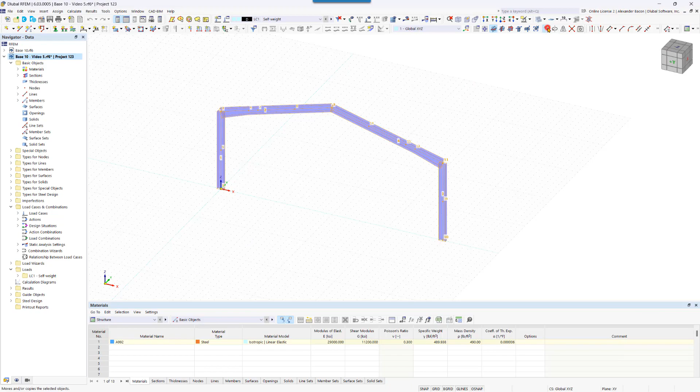Next, let's select the entire frame and then click the Move and Copy button. The new dialog box is similar to the mirror dialog box.

Since we would like to make 3 copies of the frame, we first select the Create Copy checkbox and then set the number to 3.

The distance between the copied frames is 15 feet each in the opposite y direction, so we enter the corresponding displacement vector.

RFEM also allows us to create members, surfaces, or solids between the copied nodes. Thus, when copying the frames, we can also enter the purlins.

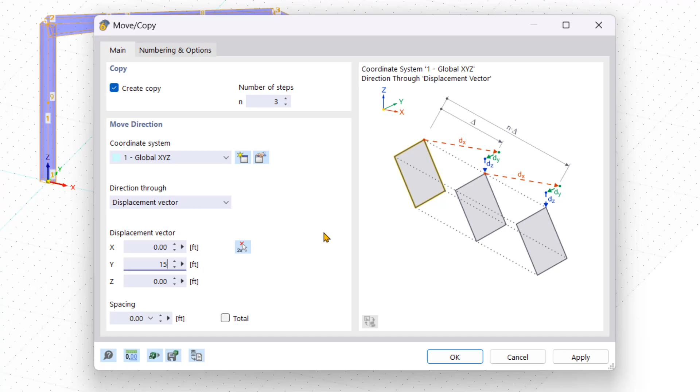To do this, we go to the Numbering and Options tab and activate the Step Links option. In the new tab, we can now select which element we would like to connect the copied nodes with.

We click Link Nodes with Member and create a new member.

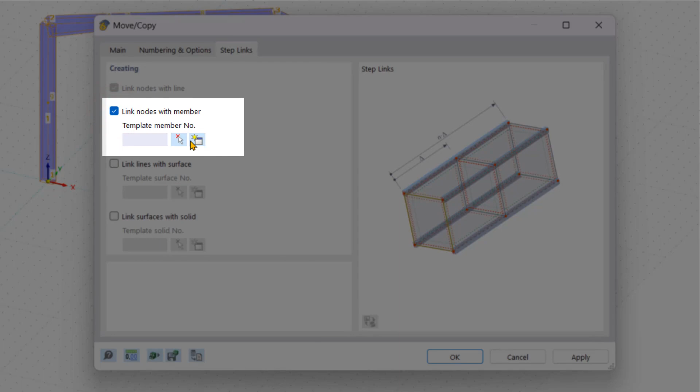The new member dialog box should be familiar by now. This time we select the truss member type for the purlins. Trusses are beams that have hinges on both member ends, thus no moments are transferred.

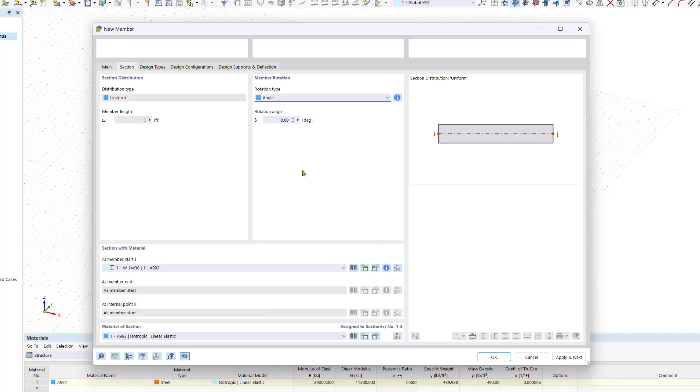In the Sections tab, we import a standardized round HSS 6.625 by 0.312 section from the library. We use filters again to limit the selection in order to find the desired one more easily.

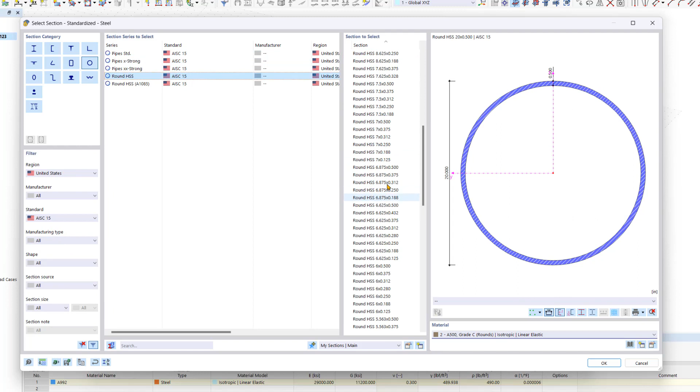We make sure that the correct material is selected and confirm all windows by clicking OK. The section is taken over, and a 3D hull will be created now from a two-dimensional frame.

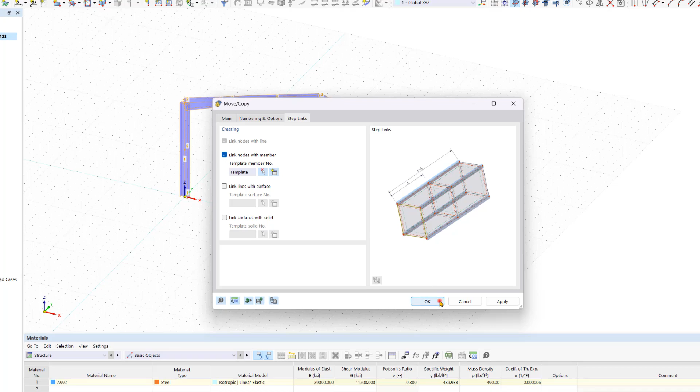The stiffening members at the start of the taper are superfluous, so we delete them.

We can simply select them from left to right by holding the Control key, and then we can hit the Delete key.

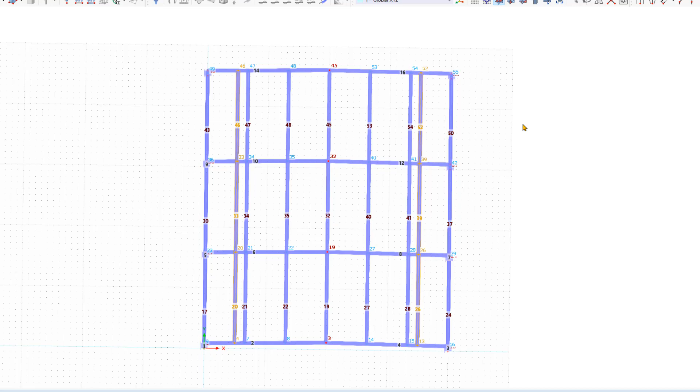Next, we use the same function to generate the gable frame. We select the 2 nodes on the side of the purlin on the outer frame while holding down the Control key on the keyboard.

Now let's click Move and Copy again, and this time set the number of copies to 1.

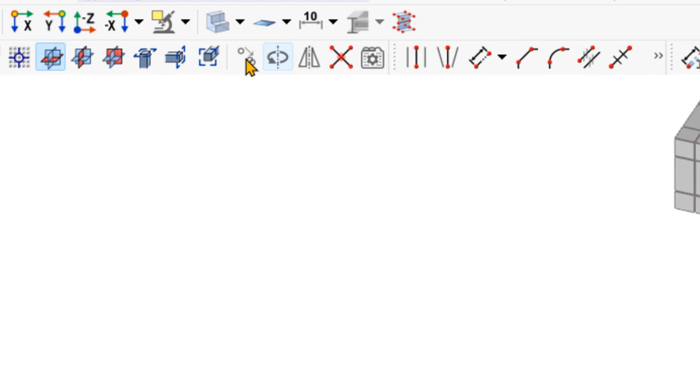Since we do not know exactly what the distance is from the 2 nodes to the ground, we use a helpful function of RFEM. We click on the mouse symbol in the displacement vector area.

Then we first select the node to be copied, and then the target point to which it is to be copied.

In our case, we select any node on a column base as the target point. The displacement vectors are automatically adopted in the dialog box, and we set the irrelevant coordinates to 0 so that the nodes are copied vertically downwards.

We confirm the data in the dialog box by clicking OK to execute the command.

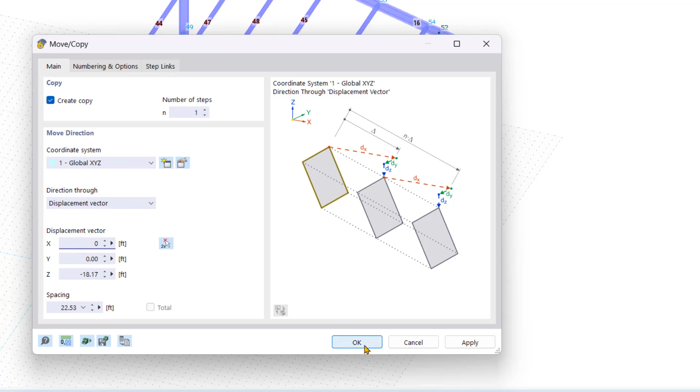Now I will show you how to change existing members in the structural analysis model. Since we activated the Link Steps function earlier, the 2 internal columns created have the same properties as the purlins.

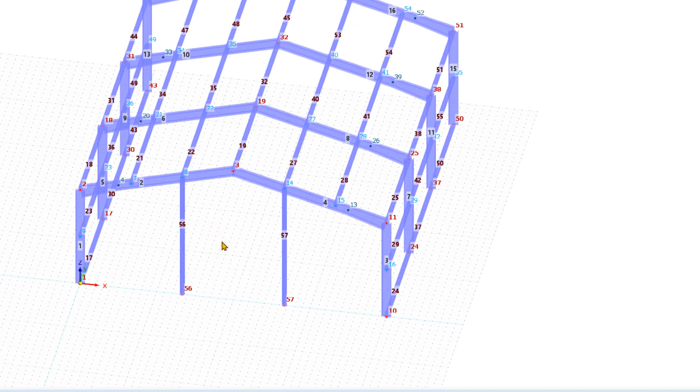To change the column types, sections, and other properties of existing members, we select them by double-clicking any of the selected members to open the Edit dialog box.

In our case, we select the beam type for the gable columns and import a standardized HP 8x36 section from the section library.

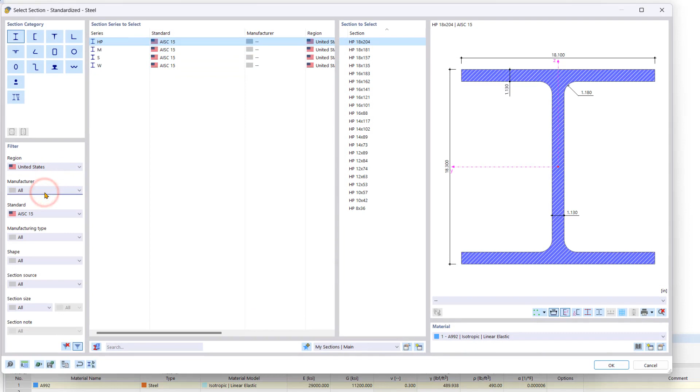We also activate a rotation of the members by 90 degrees. After closing this dialog box, the selected members will be changed.